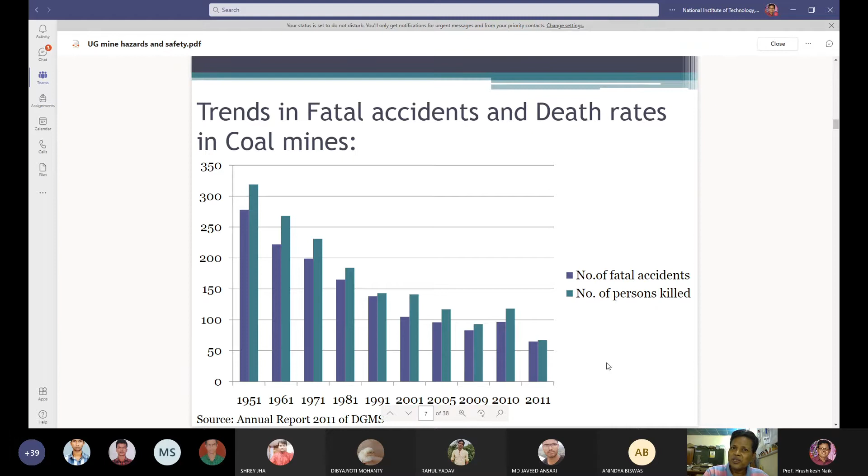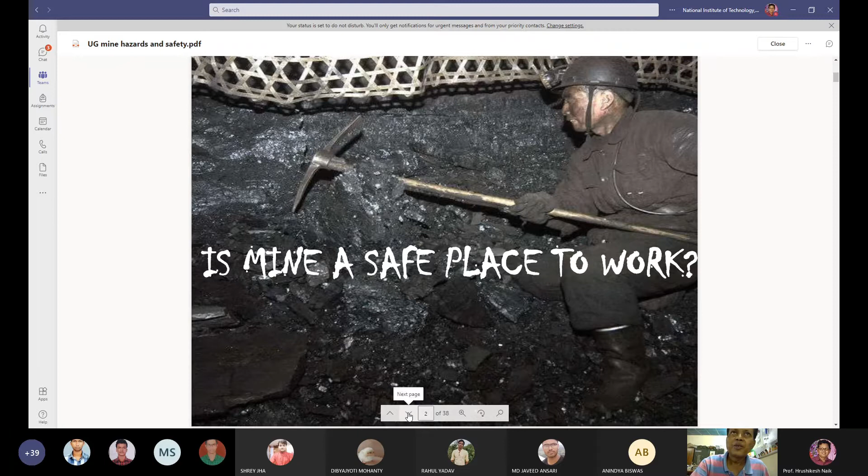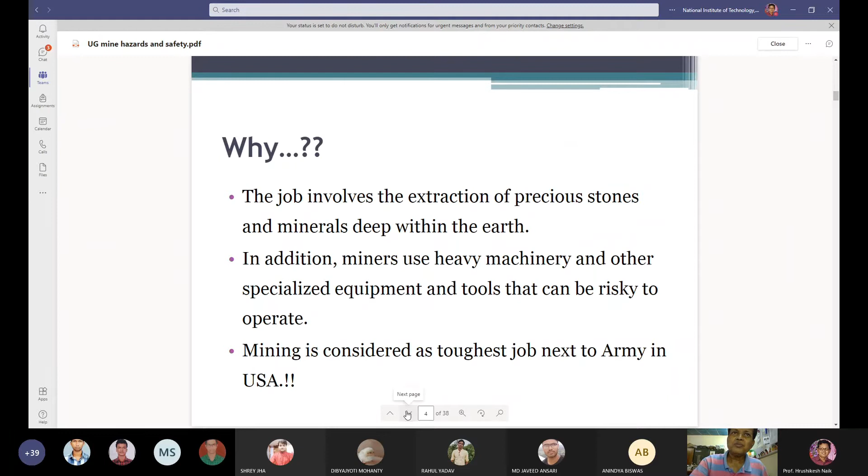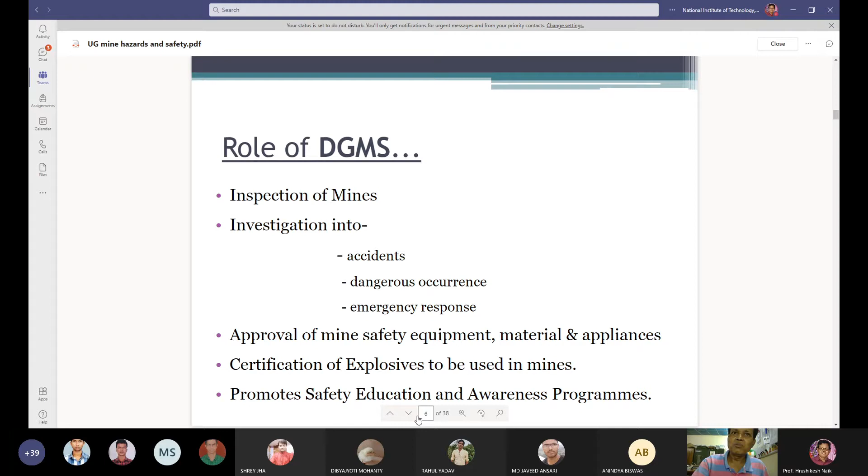So that is why mining is a hazardous profession. That is why the Directorate General of Mines Safety is to look after your safety. The role of the DGMS is to look after the safety of people working inside the mine.

So we have already discussed some of the hazards that miners face. Miners means the people who work inside the mine. Some hazards that miners face include caving, ground and rock fall.

A rock may fall down from the roof, ground may fall down from the sides or from the roof, and caving may take place. So these are some of the hazards associated with mining. There may be side fall, collapse of the pillars, gas explosion, methane gas explosion, chemical leakage, electrocution, electric shocks, coal mine fires, underground mine fires, ground movement, haulage and machinery accidents, and miscellaneous accidents. So these are the different types of accidents that take place inside the mine.

Cave-ins, meaning the roof will fall down, ground movement, collapse of the pillars, gas explosion, methane gas explosion, chemical leakage, electrocution, electrical shocks and electrical burns, coal mine fire, spontaneous combustion of coal, ground movement, haulage, and machineries may also create hazards inside the mine. Besides that, there are some miscellaneous hazards associated with mining activities.

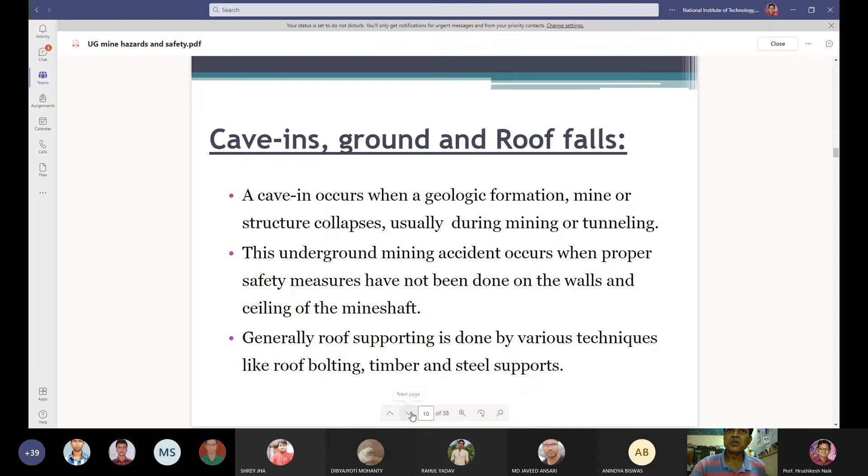So what safety measures do you have to take against cave-ins and roof falls? To prevent roof falls and cave-ins, you have to take some safety measures, like studying the geomechanical properties of overlying rocks in the laboratory, and scientifically designed support systems based on rock mass rating are applied.

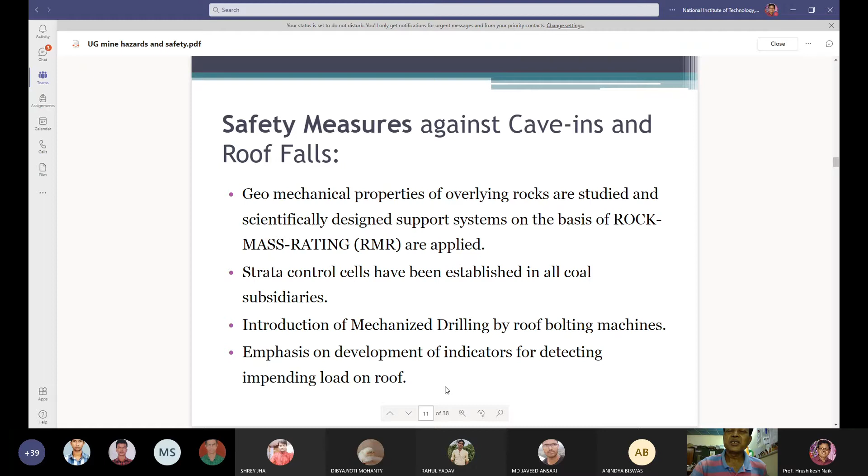Strata control cells have been established in all coal subsidiaries, and mechanized drilling by roof bolting machines has also been introduced in mines to take care of roof falls. Emphasis is given on developing indicators for detecting impending load on the roofs. These are the safety measures to prevent roof fall accidents in mines.

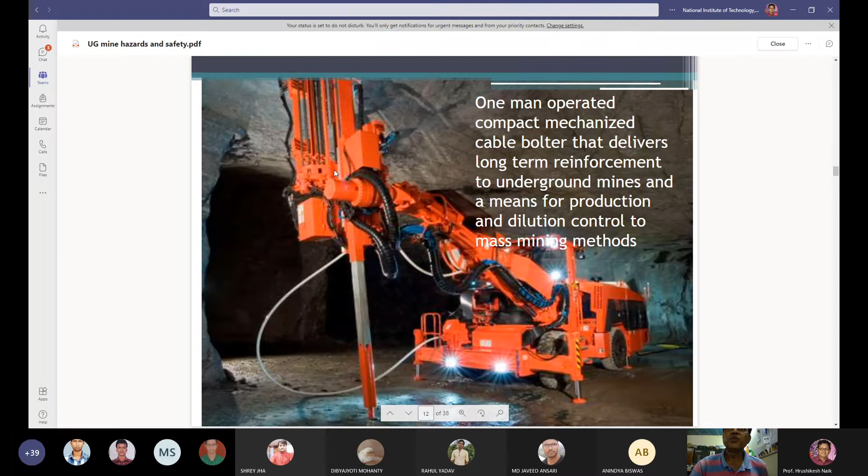This is a one-man operated, compact mechanized cable bolter that delivers long-term reinforcement to underground mines, and serves as a means for production and dilution control in mass mining methods. This machine is a very compact mechanized cable bolter that delivers long-term reinforcement to underground mines.

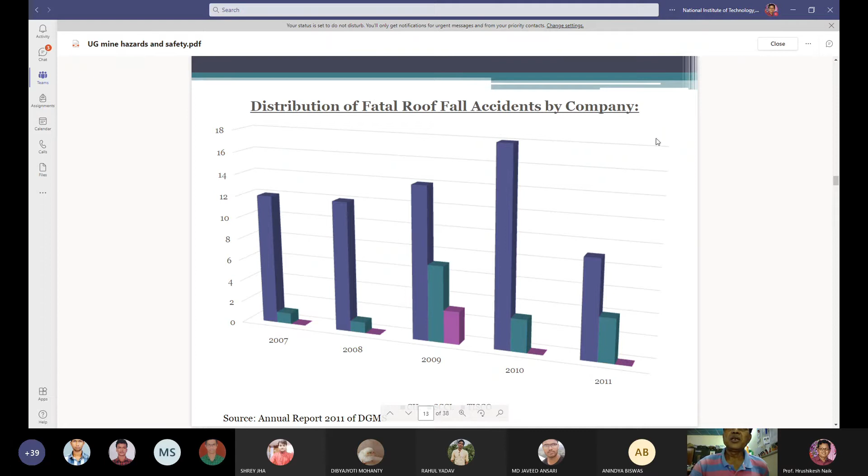If you see the distribution of fatal roof fall accidents by company, you will find that the bigger one is Coal India Limited, the green one is Singareni Collieries Company Limited, and the red one is TISCO Mines. So this is the roof fall accident data company-wise.

In 2007, the number of roof fall accidents in Coal India Limited was 12, and in 2010, the number of roof fall accidents in Coal India was 18, and in 2011, the number of roof fall accidents in Coal India was 9.

TISCO is a small organization in terms of mining, but whatever the size, TISCO has taken appropriate measures so that the roof does not fall down. However, in 2009 there were suddenly more than 2 roof fall accidents in TISCO mines. So this is the scenario of fatal roof fall accidents.

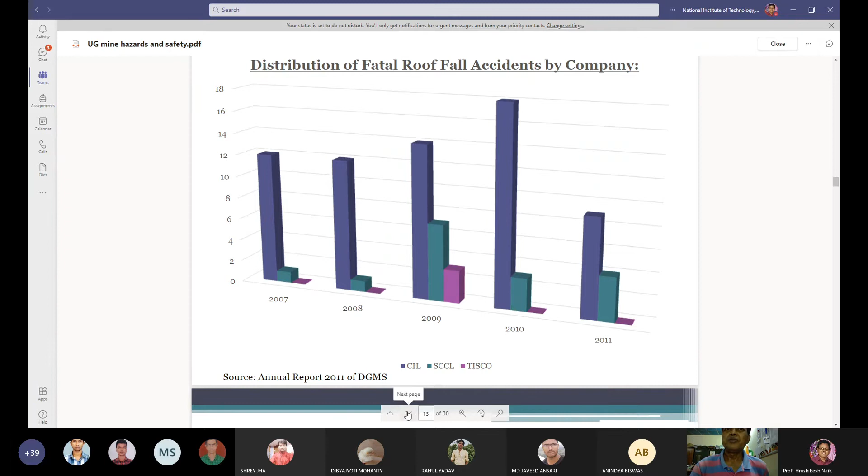Due to roof fall, how many people died is being reported in this graph. Hazards caused by side fall, like roof fall, side fall hazards are also taking place in the mines.

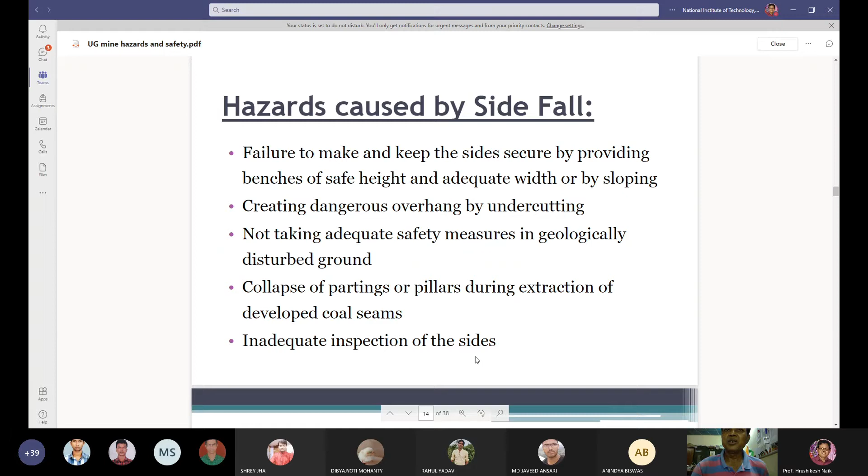Failure to make and keep the sides secure by providing benches of safe height and adequate width, or by sloping; creating dangerous overhangs by undercutting; not taking adequate safety measures in geologically disturbed ground; collapse of partings or pillars during extraction of developed coal seams; and inadequate inspection of the sides. These are the hazards caused by side fall accidents.

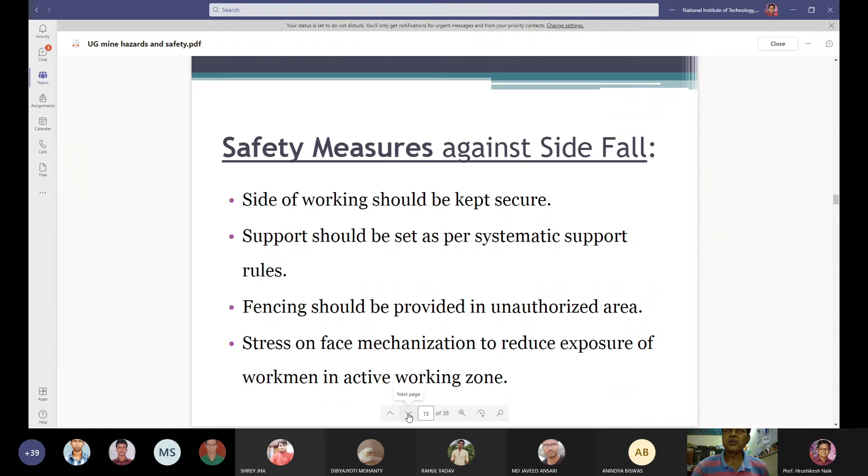Safety measures to take against side fall: how to prevent side fall? The side of working should be kept secure. Support should be set as per systematic support rules. Fencing should be provided in unauthorized areas. Stress should be placed on face mechanization to reduce exposure of workmen in the active working zone. These are the safety measures to prevent side falls.

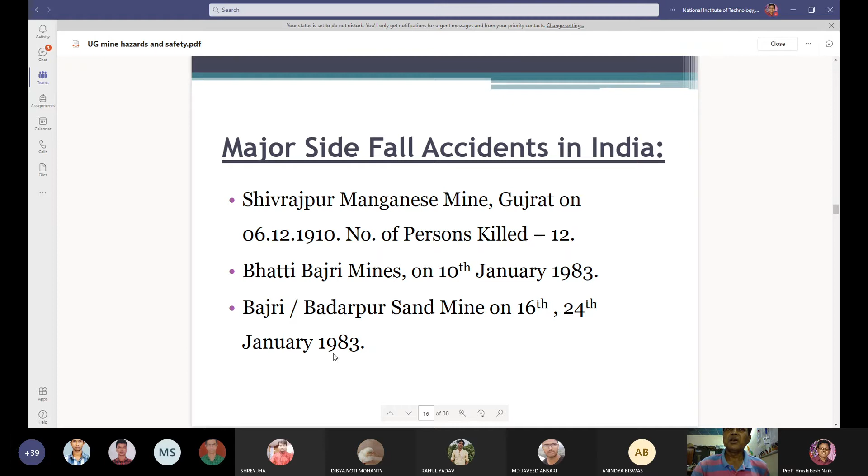Major side fall accidents that have taken place in India include the Shivrajpur Manganese Mine in Gujarat in 1910, where 12 people were killed because of the side fall; the Bhatti Bajri mines on 10th January 1983; and the Bajri Badarpur sand mine on 16th and 24th January 1983, where side fall accidents took place.

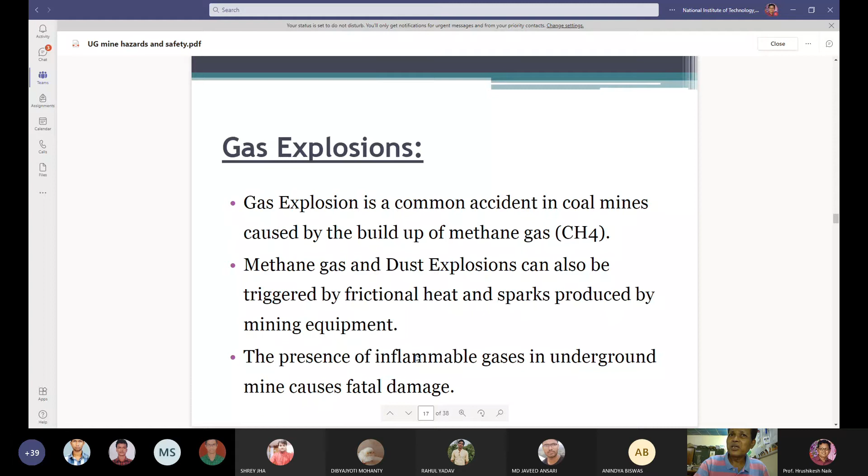In mining, coal mine gas is a problem in the mining area. So we are going to discuss in great detail about gas explosion, methane gas explosion. Gas explosion is a common accident in coal mines caused by the buildup of methane gas. Methane gas is responsible for the gas explosion. Methane gas and coal dust explosions can also be triggered by frictional heat and electrical sparks produced by mining equipment. The presence of inflammable gases in underground mines also causes fatal damage. We will discuss this in subsequent classes in greater detail.

What are the measures to be taken against gas explosion? What should you do so that there will not be any gas explosion in your mines? To prevent pockets of methane gas from forming, the work area must be properly ventilated at all times. You should make sure the equipment used in coal mines does not have defects that can create sparks and set off explosions. You should maintain reasonable working conditions with respect to temperature, humidity, and amount of airborne dust. These are the measures to prevent methane gas explosion.

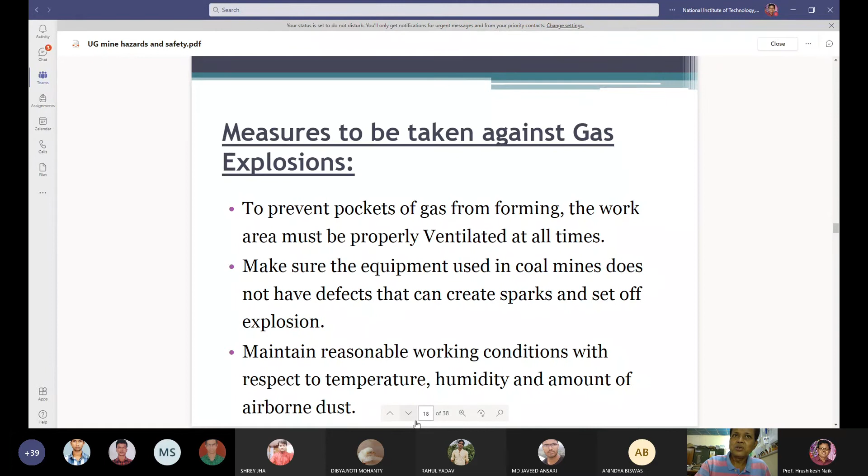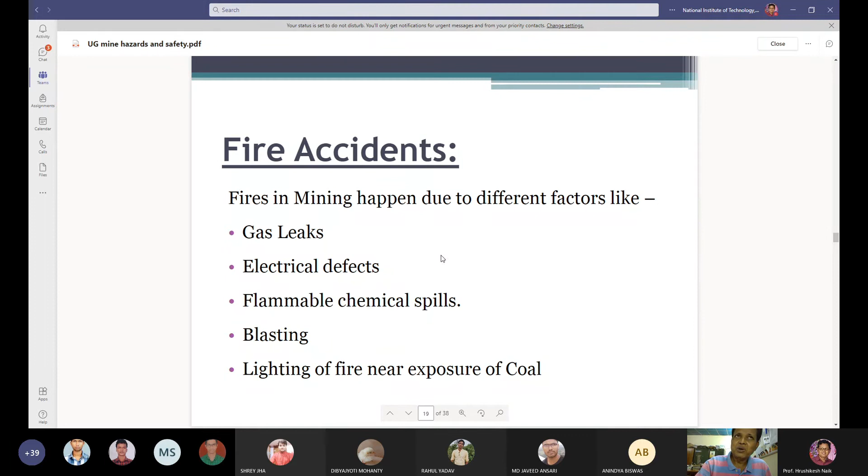In coal mining areas, another problem is fire accidents, coal mine fire accidents. We have to discuss in great detail the fire accidents or coal mine fire, spontaneous heating of coal, spontaneous combustion of coal. Fires in mining happen due to different factors like gas leak, methane gas leak, electrical defects, flammable chemical spills, blasting, and lighting of fire near exposed coal. These are the different factors which can cause fire accidents in the mining environment.

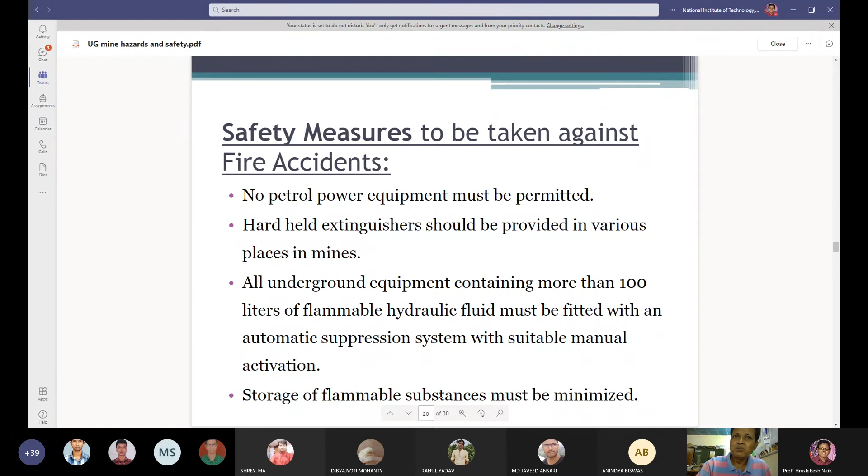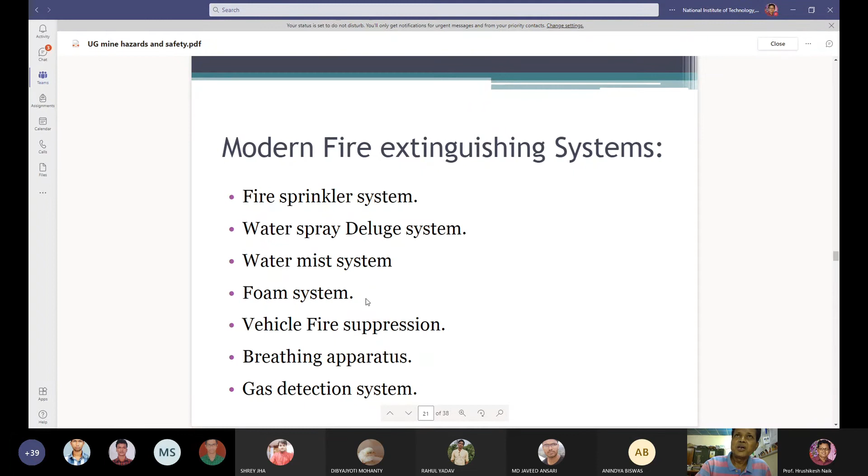What safety measures do you have to take against fire accidents? No petrol-powered equipment must be permitted to be used in underground coal mines. Handheld fire extinguishers should be provided in various places in the mining premises. All underground equipment containing more than 100 liters of flammable hydraulic fluid must be fitted with an automatic suppression system with suitable manual activation. Storage of flammable substances must be minimized. Modern fire extinguishing systems should be introduced in the mining area, like fire sprinkler system, water spray deluge system, water mist system, foam system, vehicle fire suppression, breathing apparatus, and gas detection system. These are the fire extinguishing systems you have to incorporate in your mining area.

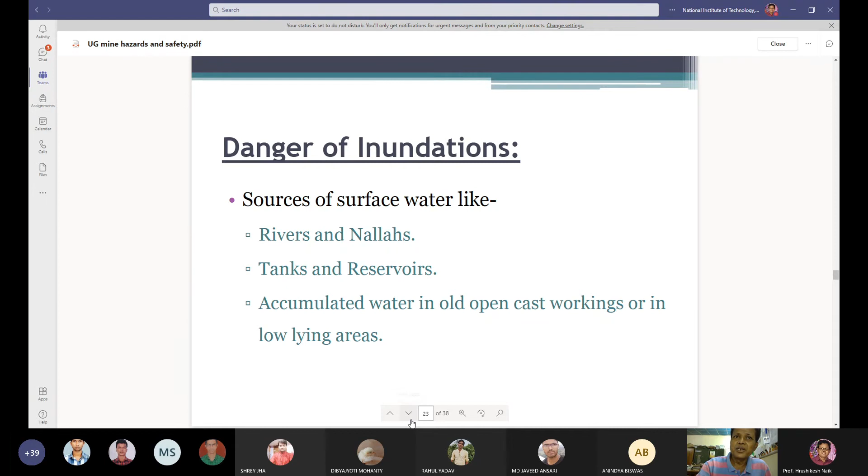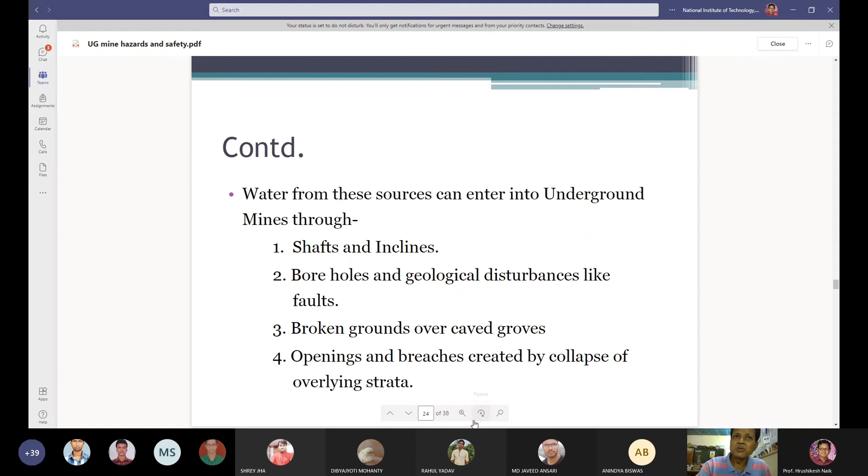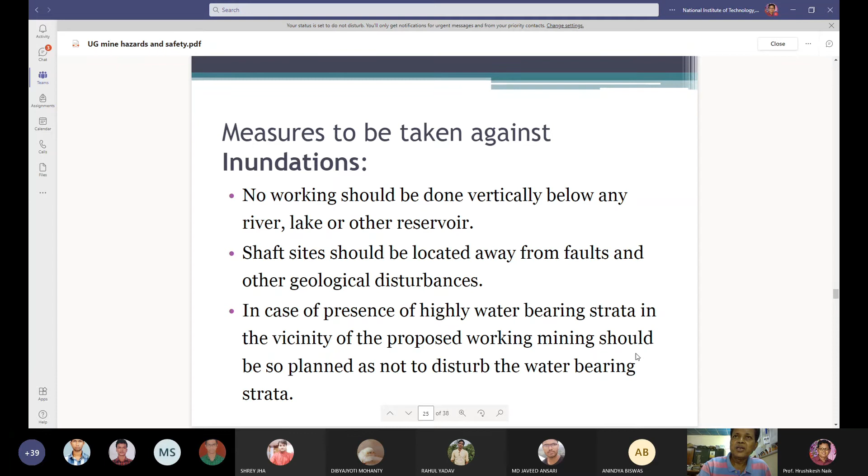Measures to be taken to prevent inundation: no working should be done vertically below any river, lake, or other reservoir. Shaft sites should be located away from faults and other geological disturbances. In case of presence of highly water-bearing strata in the vicinity of proposed working, mining should be so planned as not to disturb the water-bearing strata.

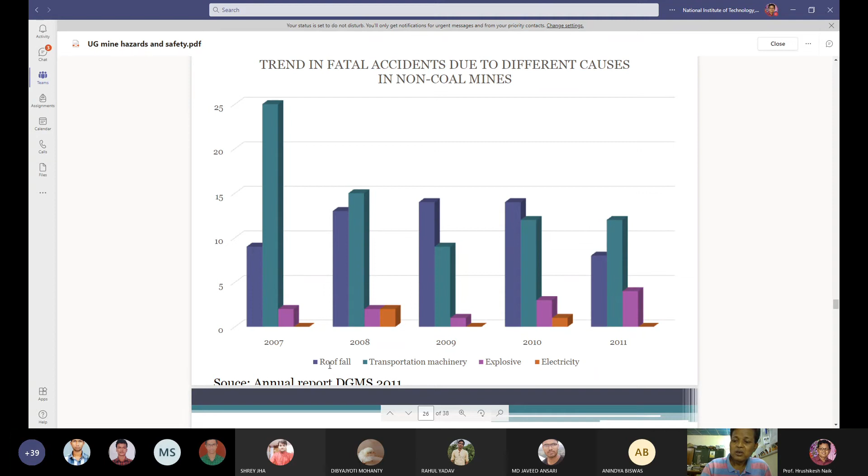These are the trends in fatal accidents due to different causes in non-coal mines - the causes are roof fall, transportation machinery, explosive, and electricity.

Now, environmental hazards of mining. Unregulated mining has the potential to release harmful substances into the soil, air, and water. Airborne hazards include several types of particulate matters, naturally occurring gases, engine exhaust, and chemical vapors. These are the airborne hazards. Physical hazards include noise, segmental vibration, heat and changes in barometric pressure, and ionizing radiation. So these are the environmental hazards of mining associated with mining activity - airborne hazard and physical hazard.

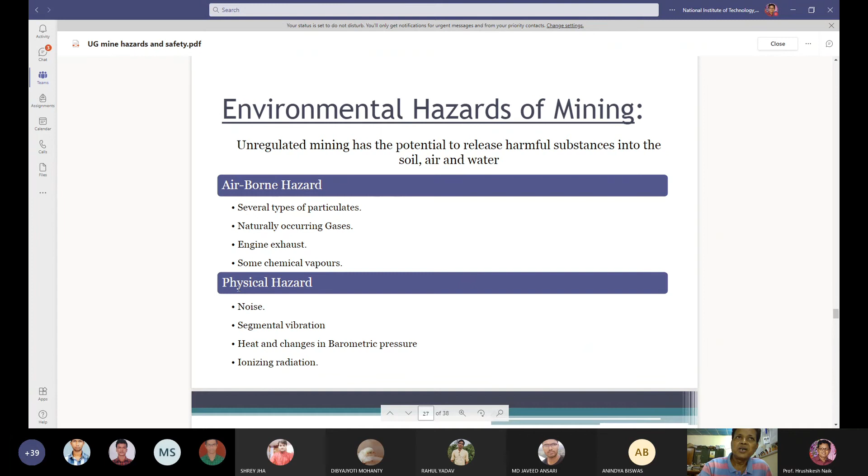In mining areas, there is a problem called acid mine drainage. Acid mine drainage, heavy metal contamination, processing chemical pollution, erosion and sedimentation - these are the different types of hazards associated with mining.

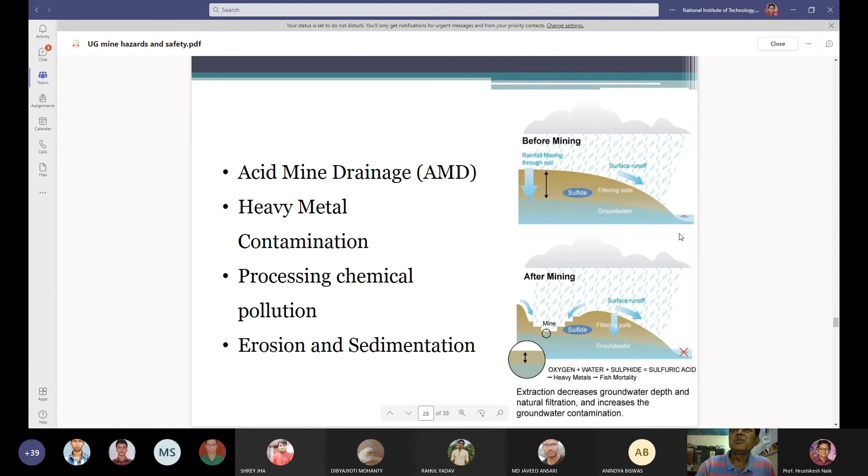Before mining, rainfall filters through the soil and surface runoff, sulfide minerals filter into the soils, and groundwater gets contaminated because of mining activity. After mining, the mine accumulates water and sulfide. Surface runoff filters through soils and groundwater. Whenever oxygen, water and sulfide come in contact with each other, you get sulfuric acid and heavy metals, and fish will not survive in that water. So extraction decreases groundwater depth and natural filtration, and increases groundwater contamination.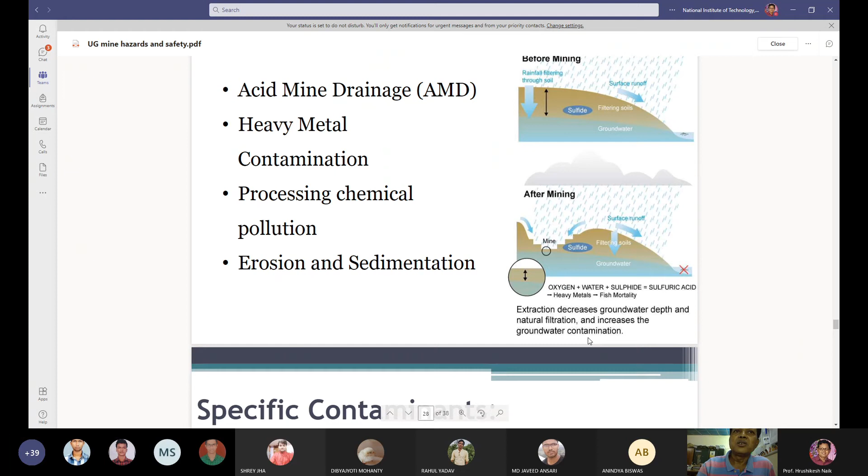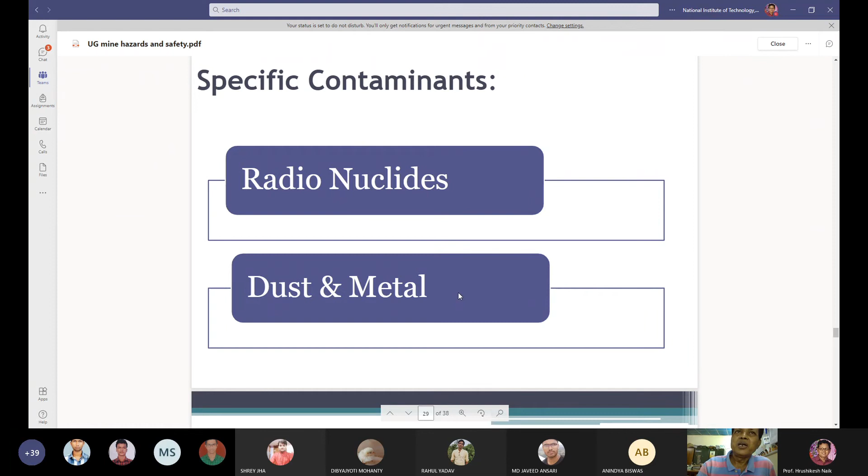Groundwater contamination - that is why there are different specific contaminants. Radionuclides you will get in uranium mines. Dust and metal you will get in all metal mines.

Because of mining, you are going to face health hazards. Physical accidents and traumatic injury remain a significant problem and range from trivial to fatal. Chemical hazards - crystalline silica is a serious hazard in mining, which leads to silicotuberculosis, chronic obstructive pulmonary disease, lung cancer, and skin splashes with cyanide solutions are hazardous.

Biological hazards include the risk of tropical diseases such as malaria and dengue, substantial at some remote mining locations. Leptospirosis and ankylostomiasis are also very much found in mining areas.

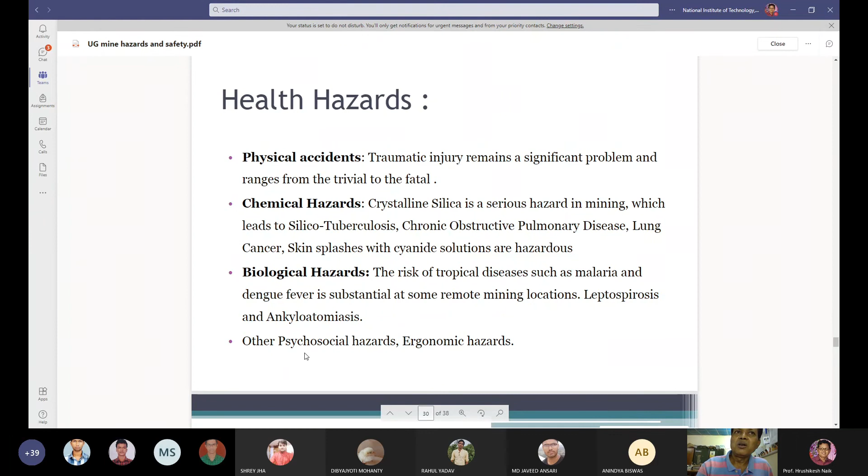Other psychosocial and ergonomic hazards are also associated with mining. Therefore, there is a need for an effective mine closure plan. Before the mine is closed, you should go for scientific closing of the mine, to avoid collapse of the land surface over an old abandoned copper mine, or subsidence pits and troughs over abandoned underground coal mines.

Other hazards associated with mining include explosives. You are using explosives for blasting purposes, so poorly designed shots can result in misfires and early ignition.

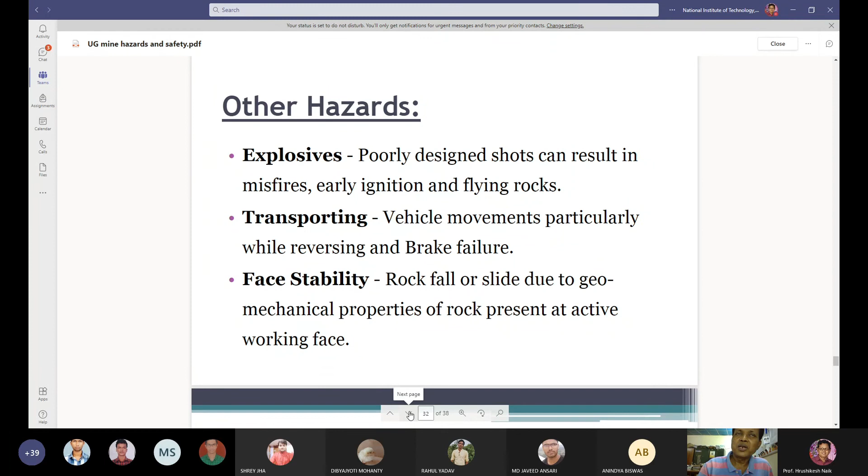Transporting machineries like dumpers and vehicle movements, particularly while reversing, and brake failure can cause hazards. Face stability - rockfall or slides due to geomechanical properties of rock present at active working faces. These are some of the other types of hazards associated with mining.

Electrical hazards we have seen include electric shock or electric burn, ignition of fire damp or coal dust, and fire arising from electrical defects. These are the electrical hazards associated with mining.

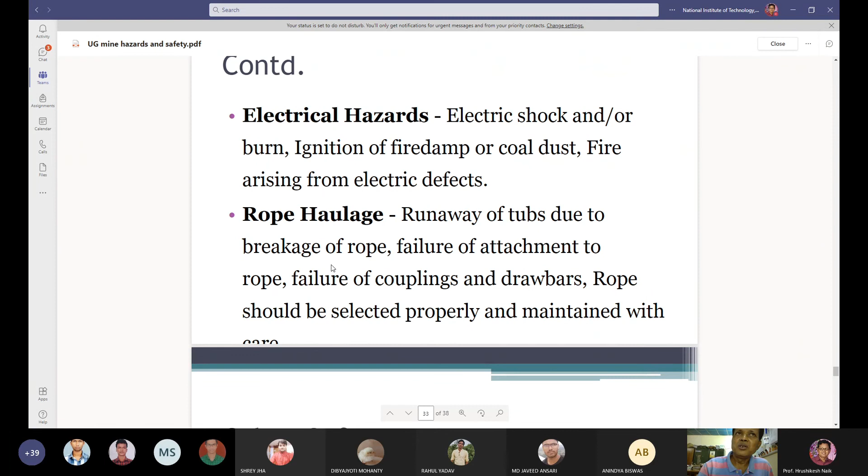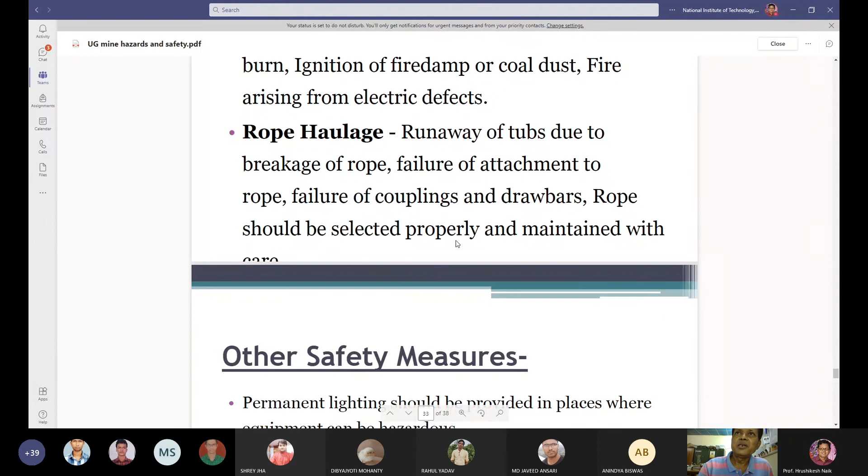Rope haulage hazards include runaway of tubs due to breakage of the rope, failure of attachment to the rope, and failure of couplings and drawbars. Rope should be selected properly and maintained with care.

What other safety measures should be taken to prevent these accidents? Permanent lighting should be provided in places where equipment can be hazardous. Cables should be provided with double wire armoring.

Inspection should be carried out with respect to earthing points regularly. Storage of flammable substances must be minimized. Haulage curves should be properly designed and constructed, and bad patches in the track should be corrected.

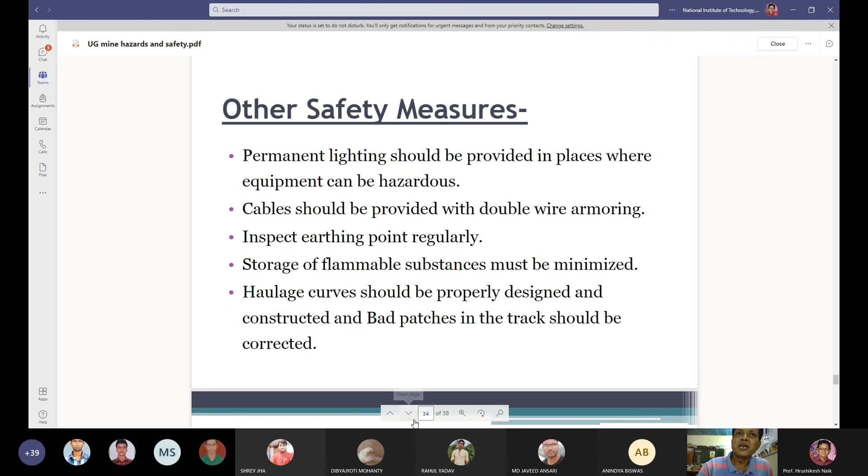Regular examination of the face must be done, and remedial measures must be taken to make it safe if there is doubt that a collapse could take place. Vocational training should be given to mine workers to prepare themselves to face the challenges of mining. Emergency response systems and emergency action plans are to be designed for the mining industry.

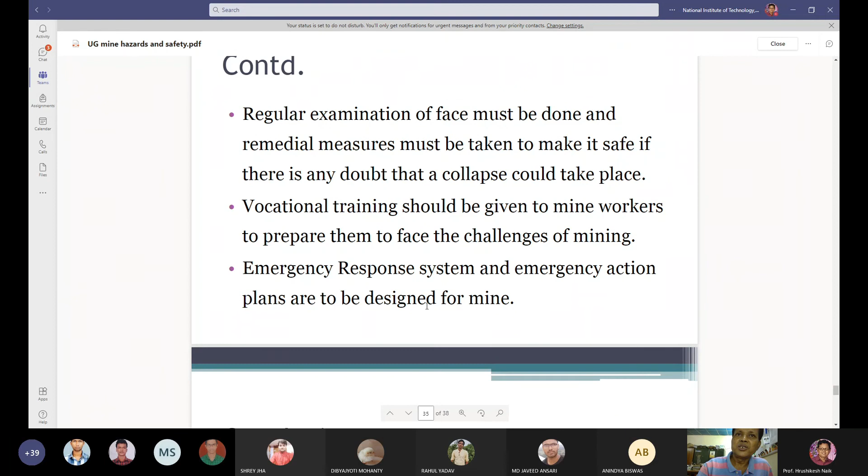Only then will you be able to control the hazards associated with mining. In conclusion, we can say safety is the major concern in the mining industry. The hazardous risk of any industry should be low to attain profits.

In the future, the mining industry may be fully modernized by advanced technology like automation and remote operations. Mining was a hazardous profession in earlier days, but if you say now mining is hazardous, then you are wrong.

In the 2000s era, there are no accidents in the mines. Very few accidents, or zero accidents, are achieved in mining. Mining is no more a hazardous profession now, because of the introduction of advanced technology like automation, automatic operation of equipment, and remote operation of equipment. So the hazards are eliminated, and no person goes to the face where mining activities are going on. That is why mining is no more a hazardous profession.